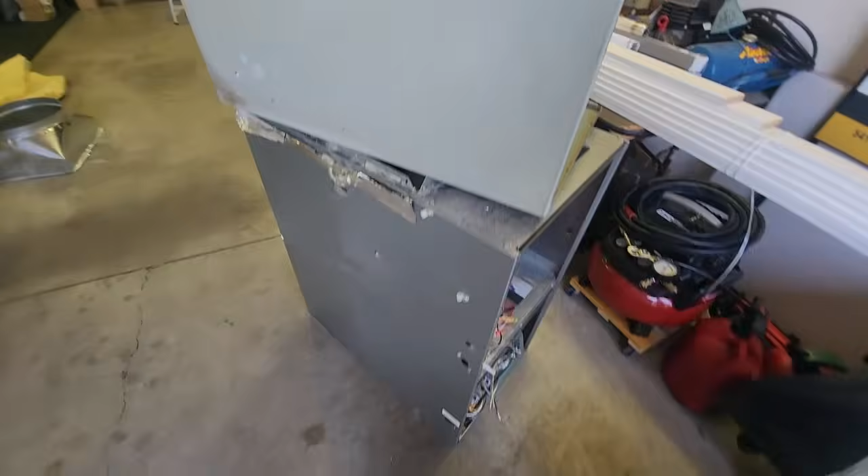Alright guys, we're here on this dual fuel system. There's our old coil, already pulled out, and the old furnace pulled out too. That's the old Rheem rectangle that I love. There's our new furnace, new Bosch heat pump, and Bosch coil. I'm going to reuse that square-to-round.

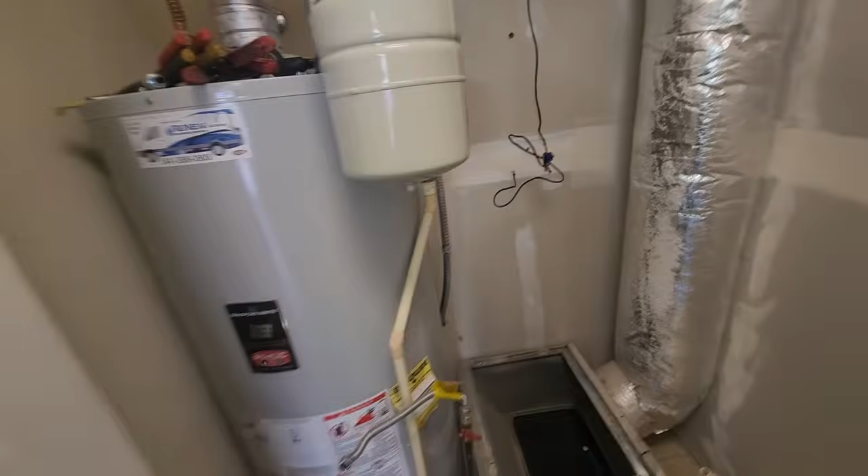I sold the guy an F100 media cabinet, and it's gonna be tough for me to fit it in here. So I'm gonna have to take this Y off, get a bunch of B vent stuff, and reconfigure all this so he can have his filter cabinet in here like I promised him. Adds a bunch of work to myself, but in the long run I think that'll make him happy.

So we're gonna go to Johnstone and pick up some missing pieces and continue on this project. I'll get you some good video today. I was just waiting for him to leave - they had some landscapers here making a bunch of noise. So yeah, we'll continue on when we get back.

Not a bad job, little closet off of a garage. Could be worse.

Alright guys, we are back. I'm going to start reconfiguring my vent pipe here to accommodate a new filter cabinet.

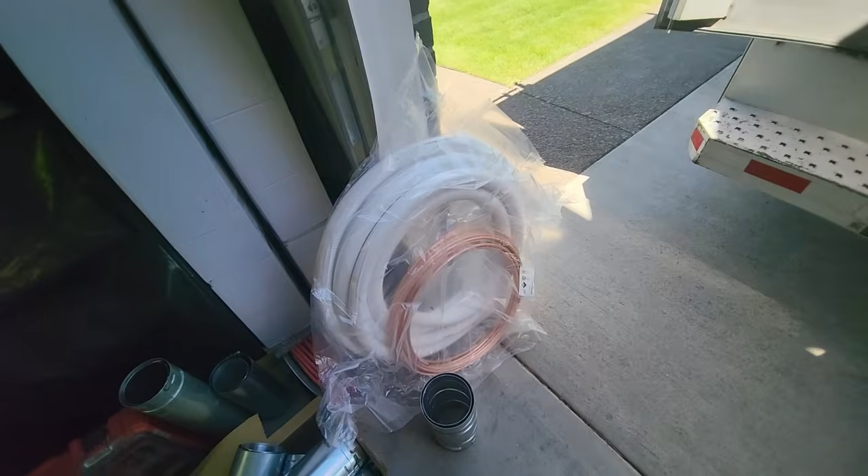Matt is going to start working on prepping our line set. Make sure you use the 8 wire, Matt, not the 10 - don't waste the 10 wire because we only need the 8. We really only need 4, but I don't have 4 wire.

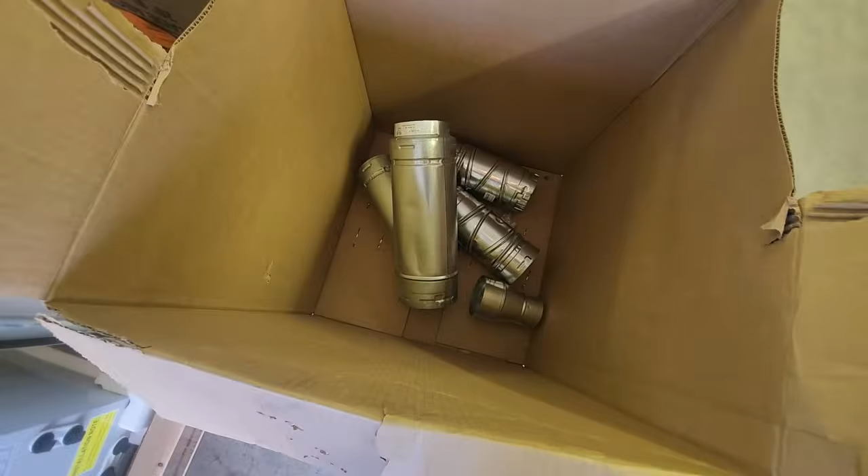They gave us some more goodies here for the vent pipe. I got a bunch of stuff here, so should be able to reconfigure it the way we need it. I'm gonna get going on it. Alright, let's get this guy cut up.

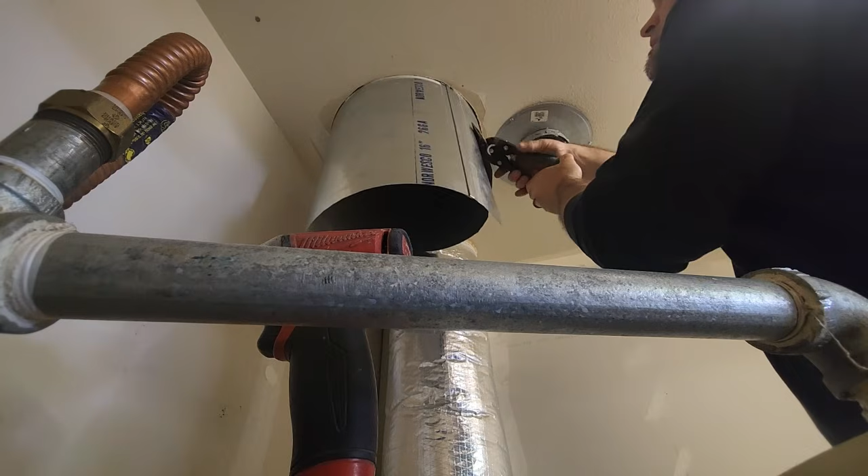More better? More better.

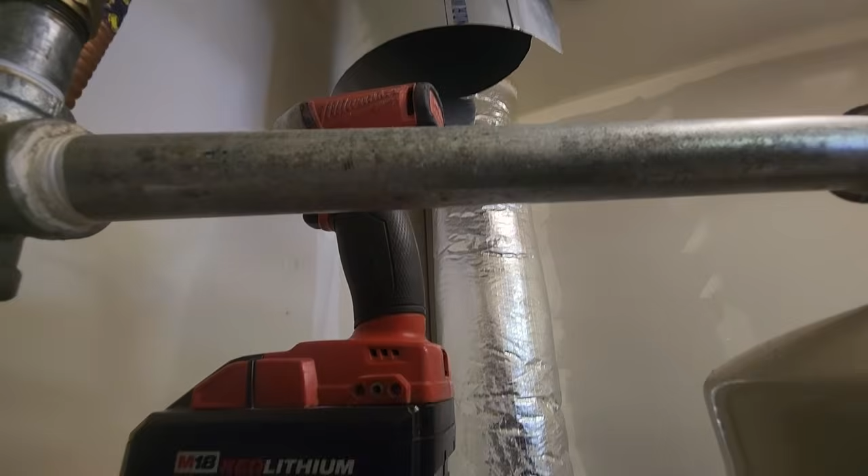Ah, damn it. Hey, that one hanging on your door was the 8, right? You should check it. It is - well, it looks like 8, but my eyes aren't that bad. Or good. Give me a break. Yeah, that should be better. That should be more better.

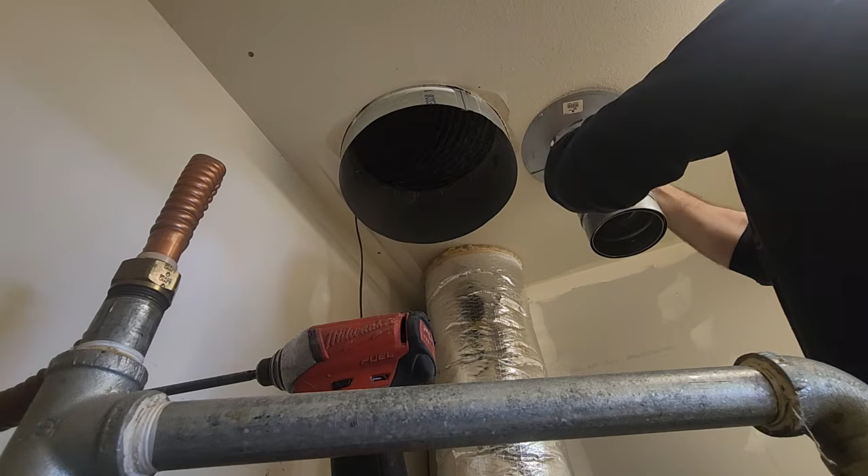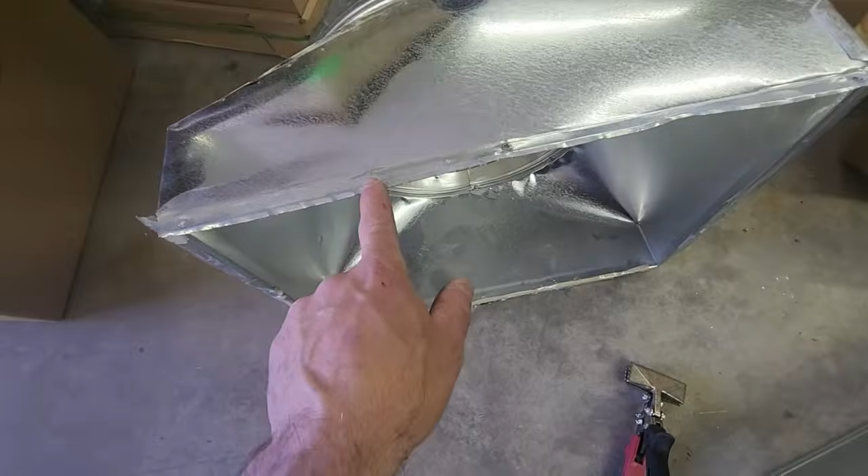Alright, I'm going to get my square-to-round put onto my air cleaner, but I need to flip these flanges around to the inside - they're all on the outside. So let's do that.

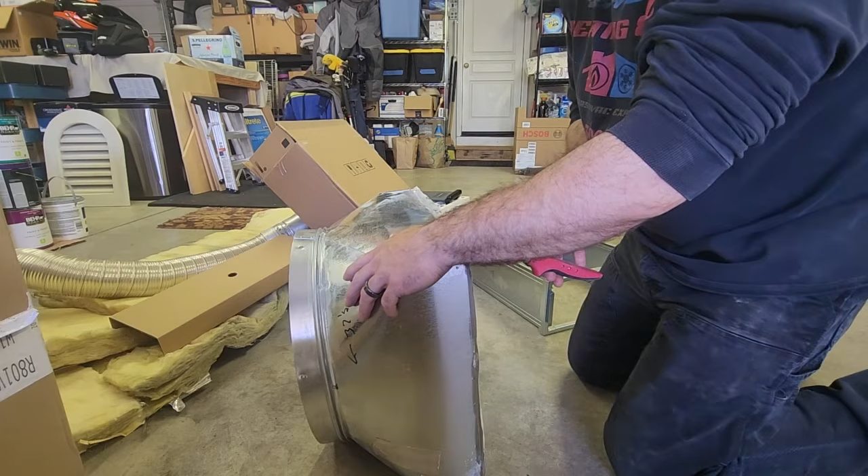Same thing I had to do on that other job. What's that? That's the number 10.

Light gauge metal. Snip those corners.

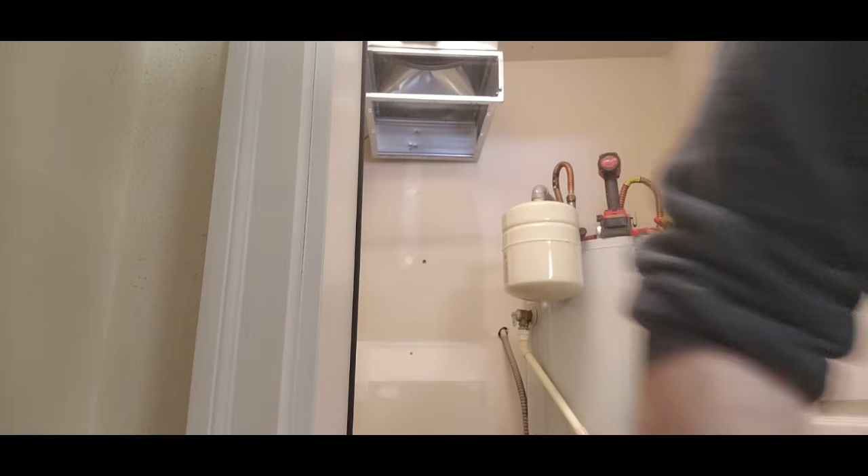Alright, let's go get that furnace. It's like down, right? No. Grab it on the backside. Jesus Christ, there's nowhere to grab it. Can I grab it?

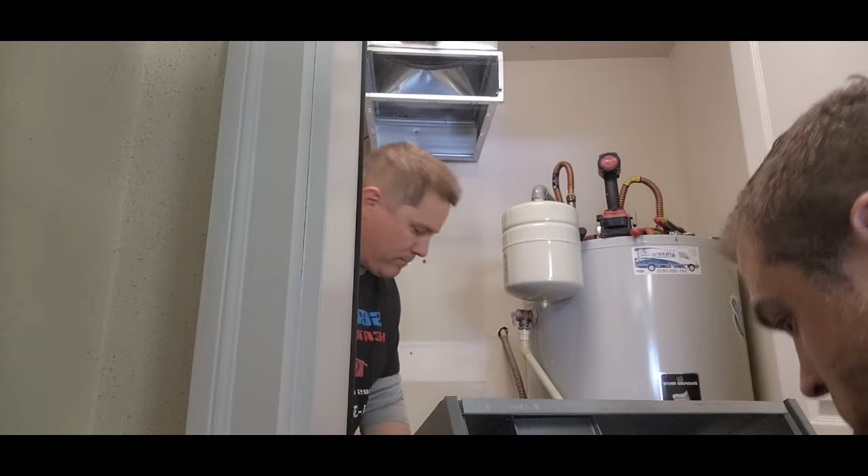No, I don't want to drag it on that. Towards me. Grab it on the clear bottom.

There it is. Beautiful. She is in.

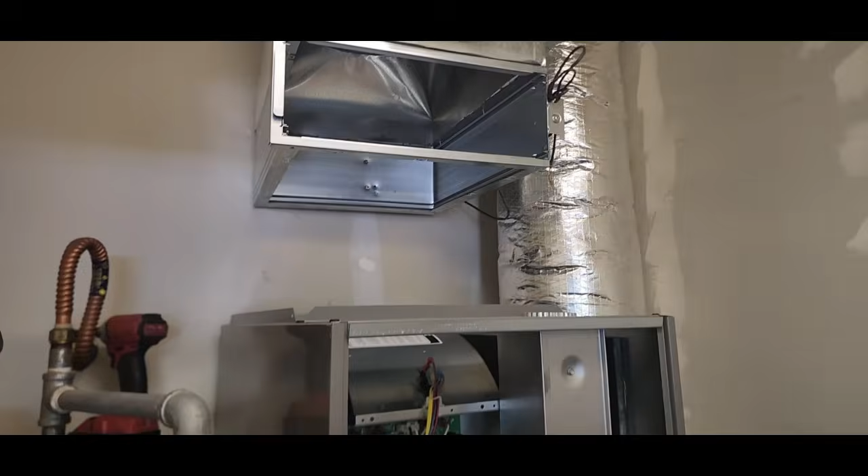That's what I gotta build. That'll come down a little bit too - that'll give us plenty of room for our vent pipe to clear. So able to make it work for him.

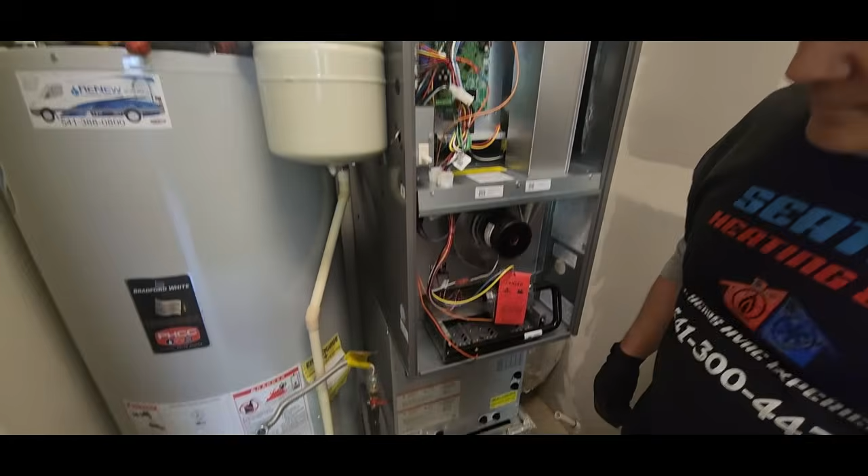She's in, like Flynn. Alright guys, we're looking good. I went ahead and pulled my screws there - sorry, sneezing, the drywall dust. Excuse me. And I got my hole sealed with some tape there, so that's pulled down.

I can get my measurement. I'll build this fitting tonight. I'm not going to temp it or anything, not with the water heater right here. I'm going to get the water heater pipe back in, and then turn the dial off pilot back onto on, so they can have their hot water. I'll get a measurement on this.

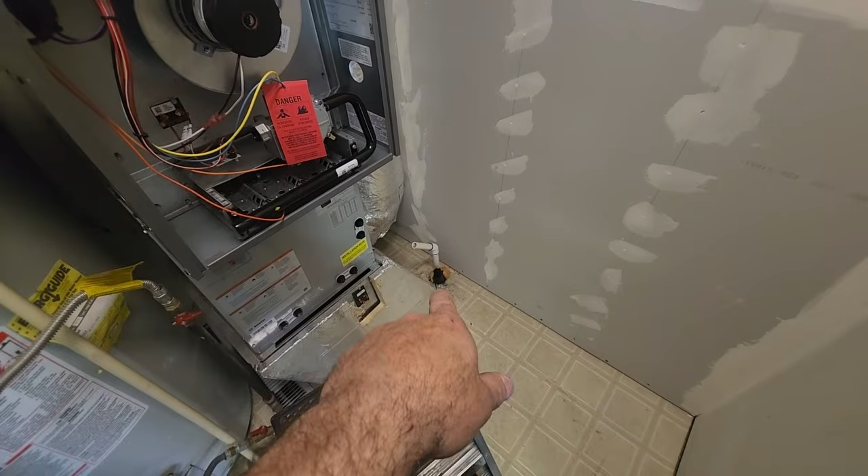I'll start doing some tie-ins, get done what we can. My brother's going to go pull the old line set out - we'll get the new one pulled because I won't have him tomorrow. So we're going to try to get everything done today that I need him for.

Alright guys, just kind of scrambling today. I got my water heater turned back on, reconnected. Turn him back to on, fire him up. I'll go ahead and just tape him off for the night. He'll be fine.

Obviously, I'm not going to get this guy hooked up, but I'll start doing my tie-ins and stuff. My brother's down in the crawl, pulling the line set right now. I'm going to make this hole just a little bit bigger so it's easier for us to pull it through up here. But yeah, we're moving along slowly but surely.

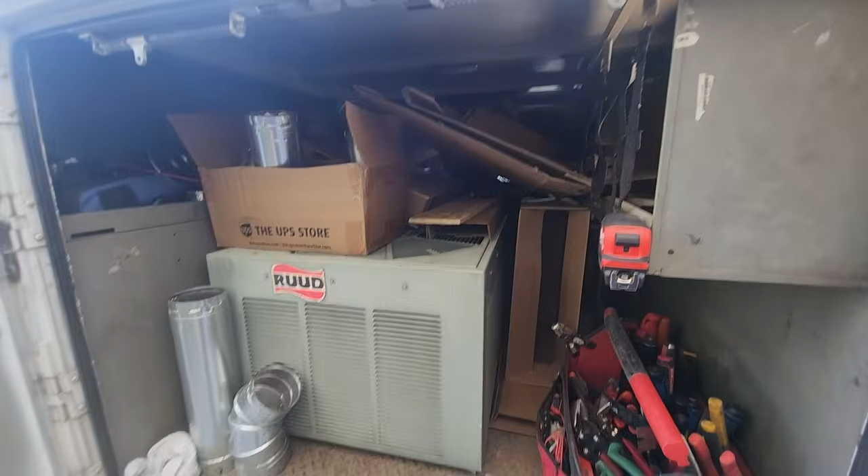All right, guys, it's about 1 o'clock. I always try to keep my work space clean, as you know, my work area. So I got everything thrown in there. Garage is all cleared out except for our condenser, which we're going to get set today. Get that box picked up. But everything's all clean all the way to the unit, which is sitting there.

I got to get a 3-inch elbow to come off the unit so I can make that turn, put my reducer on, and then I'll be able to connect my... sorry about that, I had a message. I'll get my flue pipe connected. I just have it taped over for the night. It'll be fine. Got the water heater fired back up.

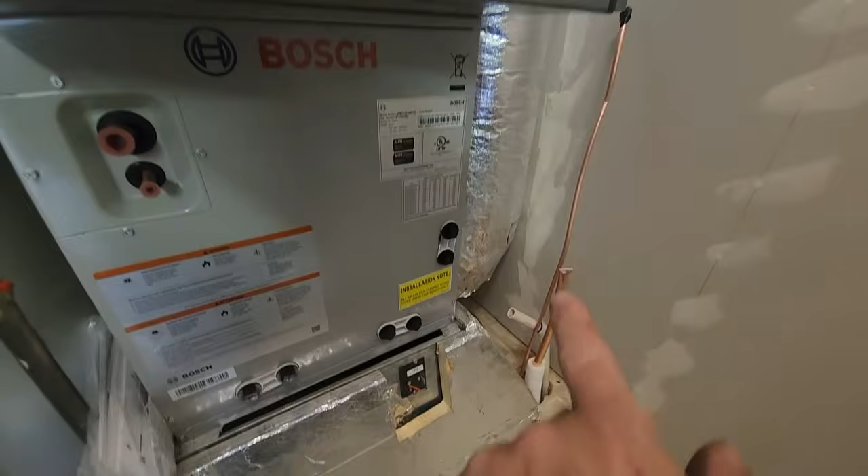I want to show you this too. So here's our line set there. My brother kinked it a little bit there at the end, so I just broke it off. And I'll have to braze from there. There's our 3/8. Nice, quick, and easy. Probably come up and over. Just do an L. It'll be fine.

I could probably get my gas pipe tied in today, get my low voltage in there. Whatever I decide to do today, we'll see. But I'm not getting this going because I'm not leaving an open return next to our water heater. No way. But everything's going to work, so I'm happy.

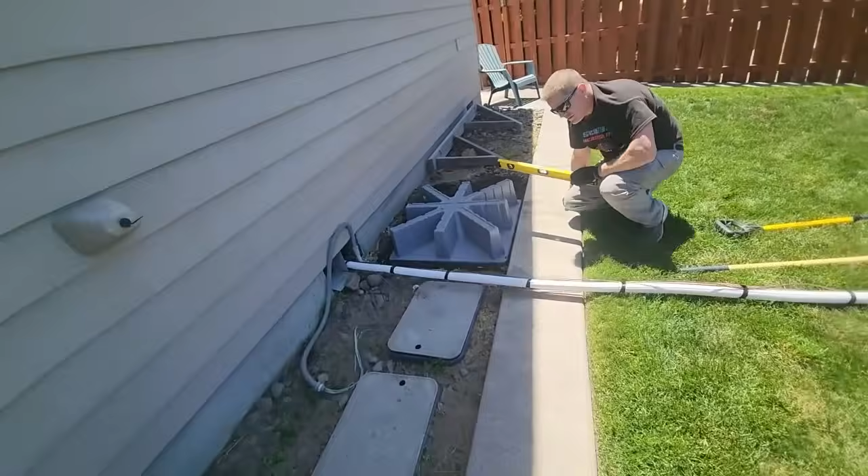Over here on the side of the house, we got Mr. Matt here getting the pad leveled up. Looks good. It's going to be a little bit closer to the wall than I would like, but you know, we're dealing with what we got. We don't want to go any closer to this here and then kind of have it sitting onto this. That would look goofy. So we'll leave it the way it is.

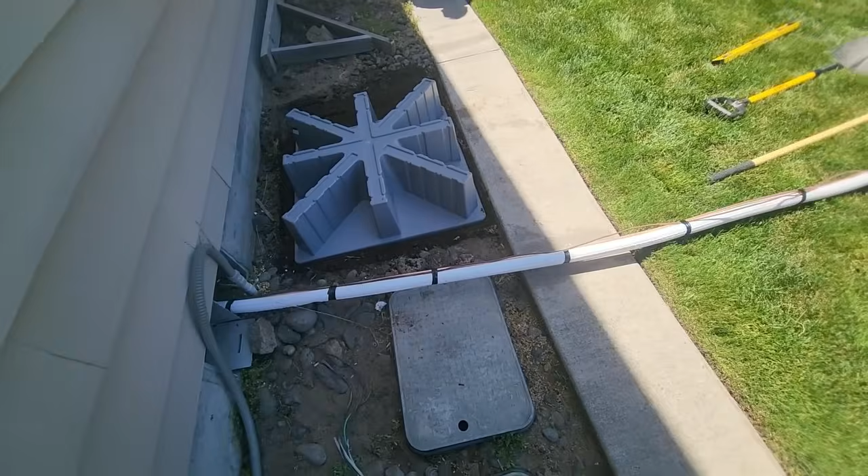There's the rest of our line set there. I can cut this off where I need to out here. And I think the way this electrical is, as long as that is, we'll be able to put the access panel out here so it's easy to work on. I'll just make it so the line set will tie in on the outside. So that'll be nice. And then we'll have plenty on the inside to use.

I'm probably going to go work on tying in that gas after we get this unit set and get the pads underneath it.

All right, Matt's unpacking our BOVB 36HDN1-M18M, 410A. Yep, I'm still getting these. I think I still have one left at Johnstone if they haven't sold it. So Matt's going to get that set. And I'm going to go over and show you, I didn't show you the model numbers of the other stuff. Show you exactly what we're installing here.

Another beautiful day here in the high desert.

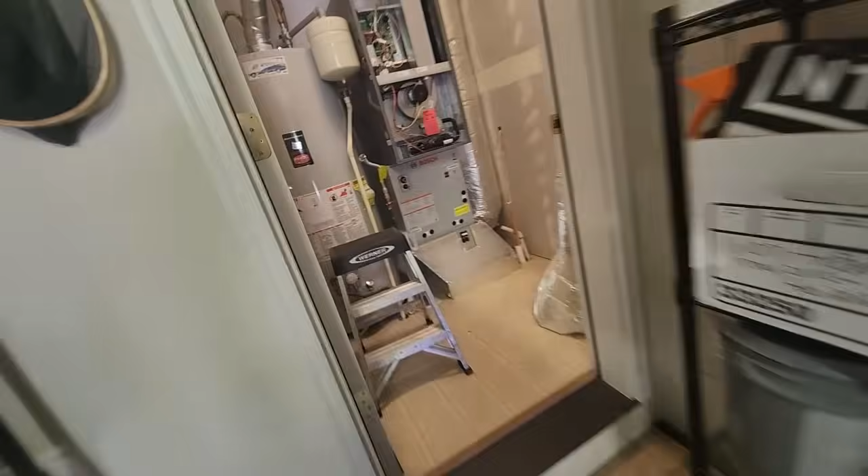Do do do do do do do do do do do do do do. Let

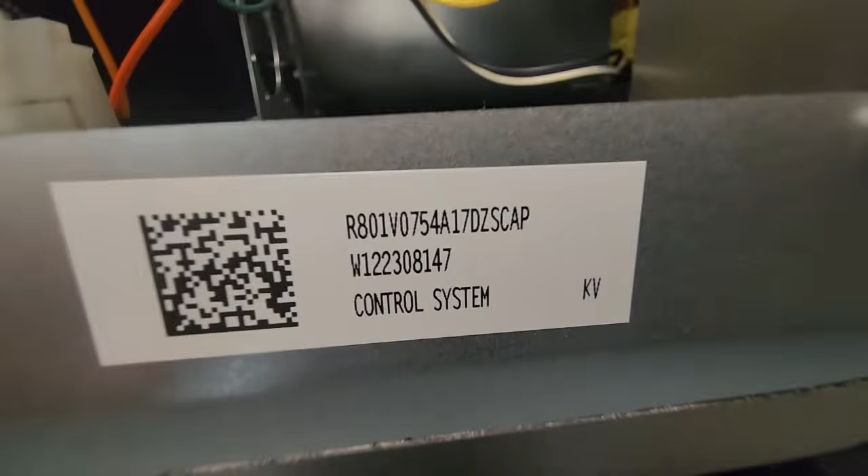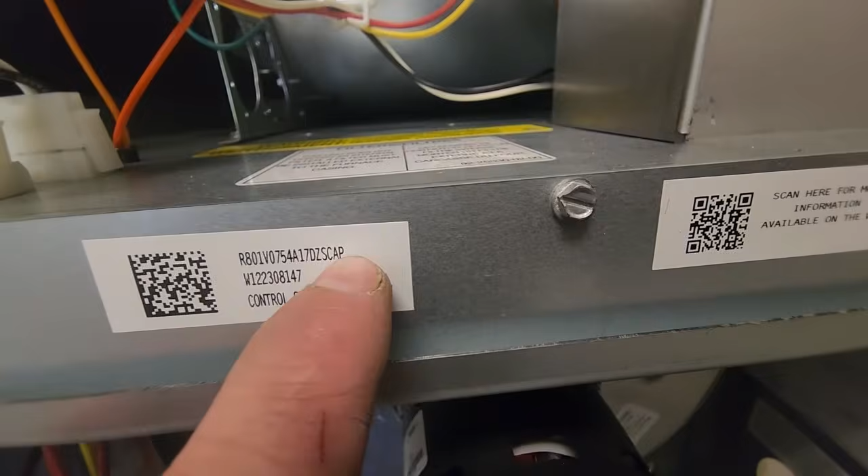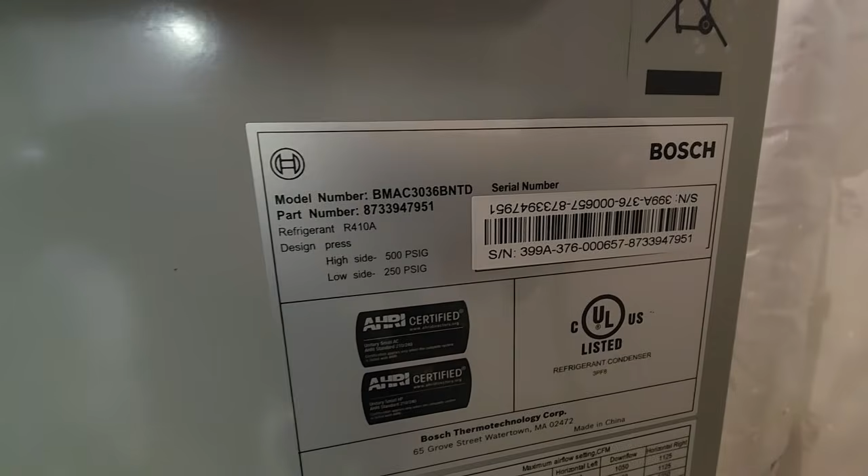Where's my model number on this guy? Do I have a sticker on the outside? I do not. Oh yeah, I do. I got a sticker right there. So this is a Rheem R801V True Variable ECM, 075 4A17 DZ for downflow. I don't know what the rest of those letters mean, some sort of product code. And then our matchup with our heat pump is the BMAC 3036B, denotes that it's 17.5 inches wide. Other product codes NTD. So that's what we're installing out here.

All 410A guys, I'm still installing them. Haven't had to install a 454 or a 32 yet. So I'm gonna go help my brother get that heat pump set over there.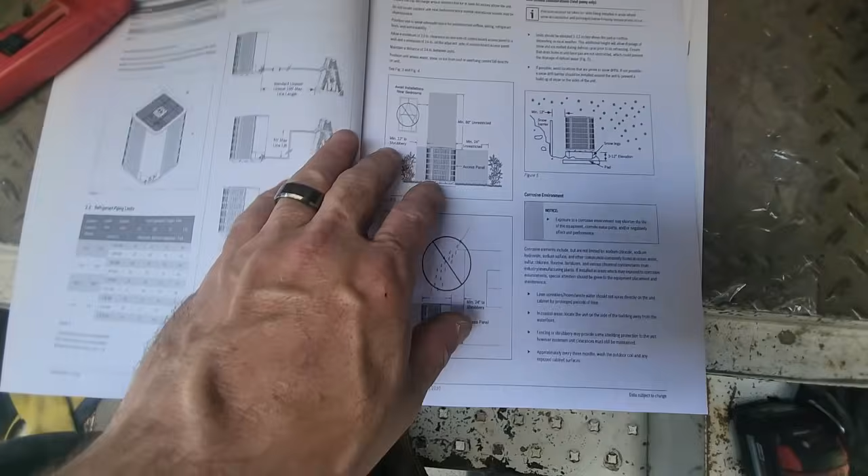All right, so that unit sits a little closer to the wall than I would like. So let's take a look in the old book here. Location restrictions, page 7. RTFM. There's page 7. So what does it show here?

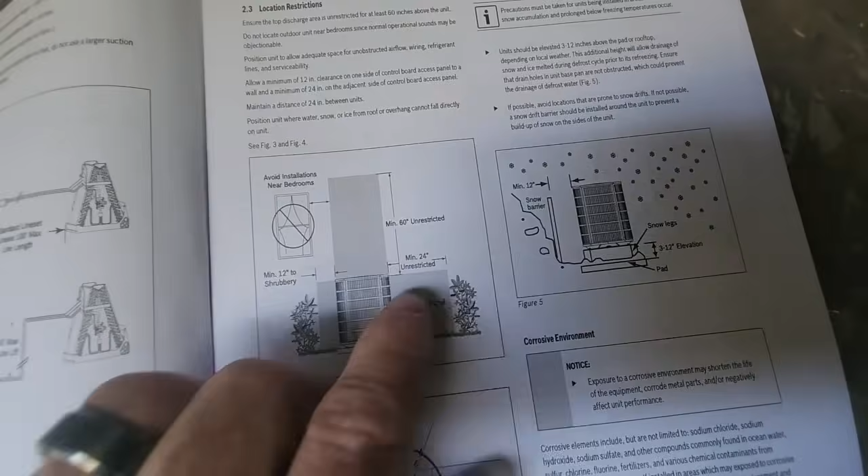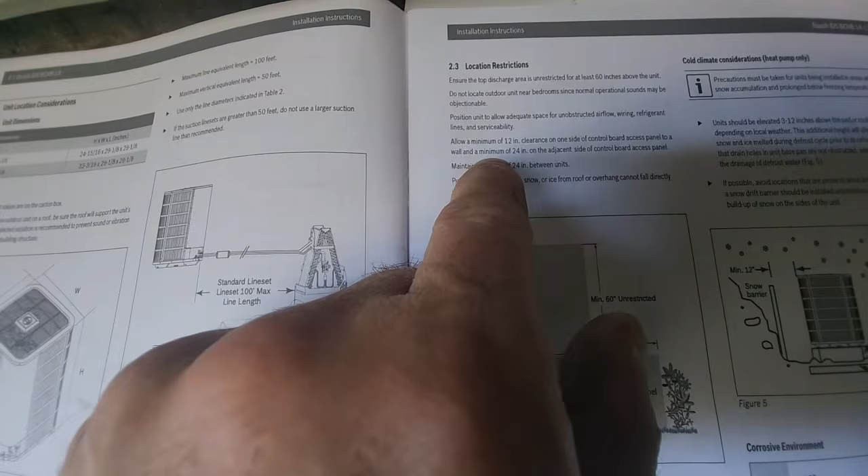Access panel 24, 12 inches to shrubbery, 60 inches above. What does it say to a wall? The unit should be elevated 3 to 12. We've got that covered. Allow a minimum of 12-inch clearance on one side of control board access panel, a minimum of 24 on the adjacent side of control board. Doesn't really say anything. It says 12 inches to shrubbery. What does it say? Where does it say anything about being to a wall?

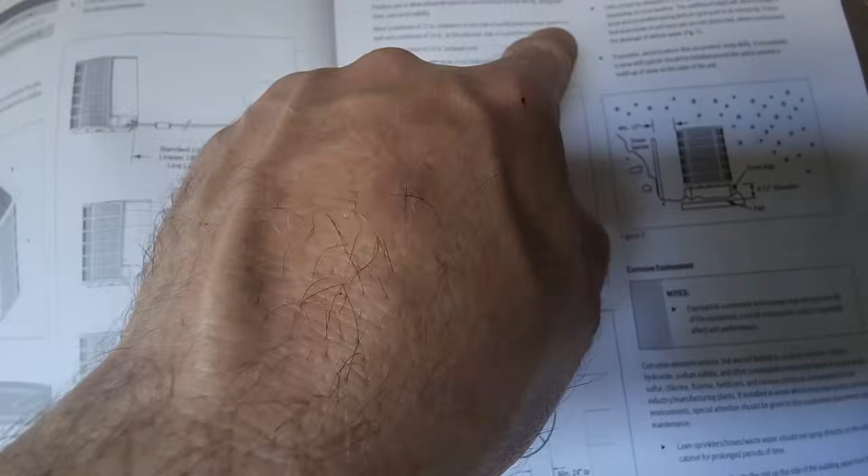I assume wall would be the same as a bush, wouldn't it? That's interesting. Avoid installation, obviously near bedrooms, it says—24 inches on the access side, 12 inches on the other side of the control board access panel. We might have to flip it so that's on the outside. We actually did put it to the access panel on the wall, but we're going to have to put it out here, and I think we'll be fine.

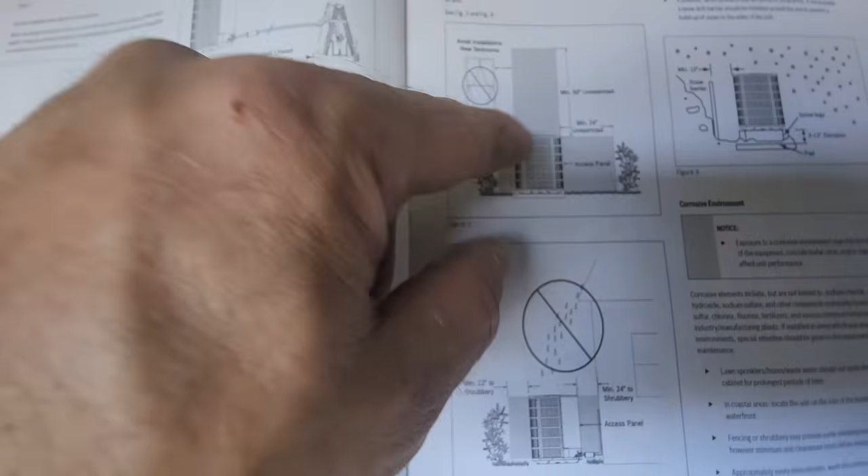Let's go see what we've got outside. All right, so according to manufacturer's instructions, we have our 12 here, 24 here. We have infinity on both, so we're good.

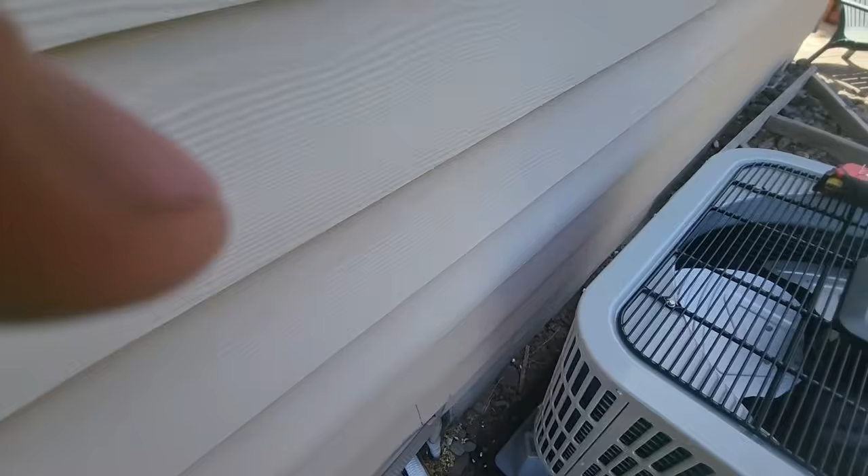On this side, we're going to have our 6 inches, so it is what it is. We're kind of restricted on where we're at here because of this walkway, so I'll call it good. I'll just make sure that when I tie these refrigerant lines in, I keep it tight here so they're not sticking out into the walkway.

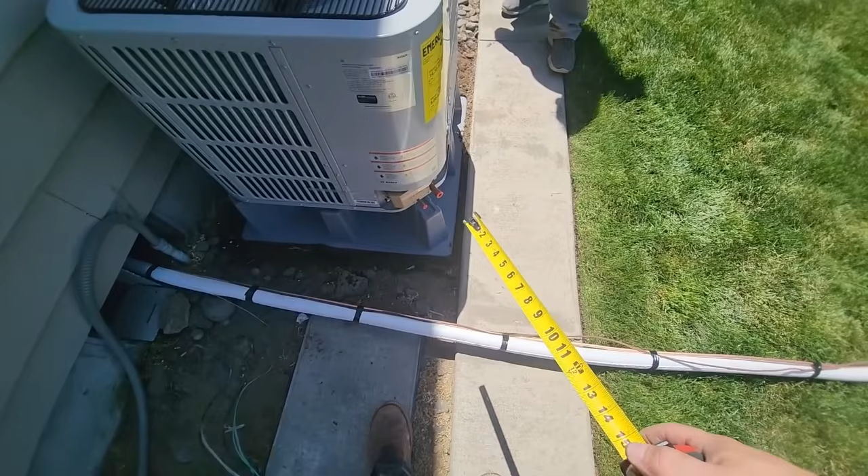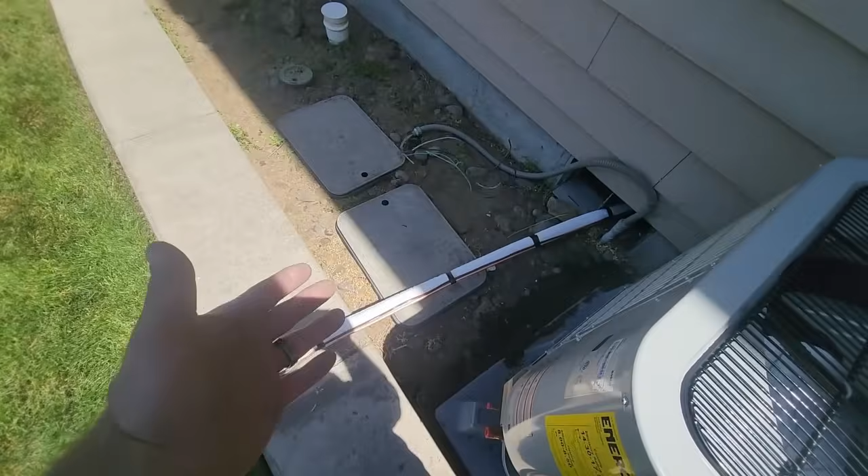All right guys, she's all set. Like I said, I'm going to have the access panel on the outside there, and I do have a gap there. It's not what I would like, but we're dealing with what we got, okay? We're not going to go over his little walkway here, or trim, whatever you want to call that. I'm sure they use that to walk from point A to point B without walking in the grass. My brother's going to cut this, tape it off, make sure it's not in the walkway, so I got plenty of material to tie that in, which will be tomorrow.

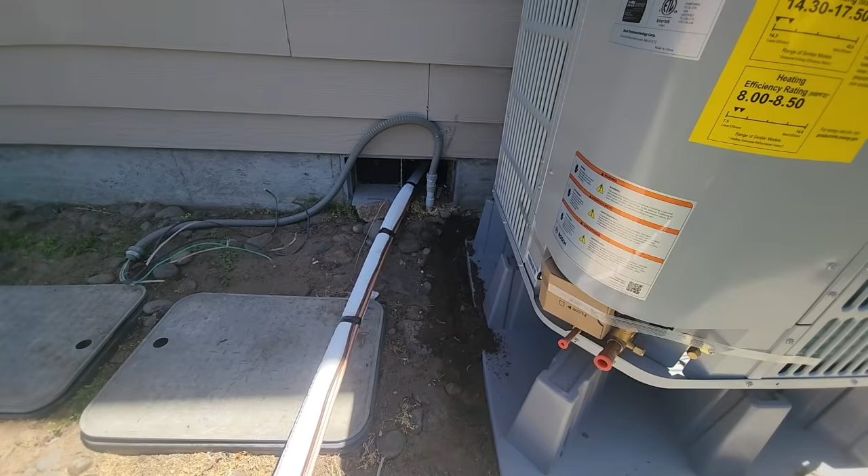Somebody made a mangled mess of that foundation vent, so I'll get that sealed up. Maybe I'll go get one of those foam blocks and cut the corner out of it. Usually works pretty good.

All right, let's get this gas hooked up. Gonna be real tough—one nipple and connecting this flex.

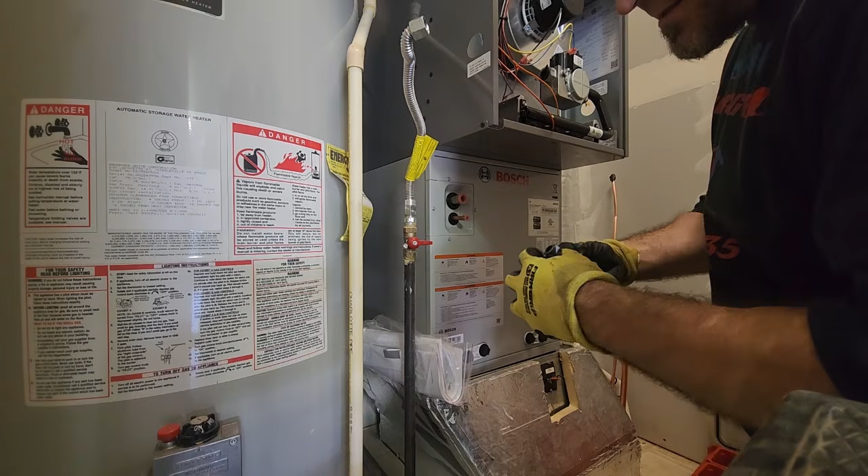I'll go ahead and tape it first. I know one of you guys made a comment that you don't think we should be taping it. Well then, how come they make the yellow Teflon tape for gas pipe then? You want to explain that one to me?

Where the heck's my pipe dope at? It's not in my organizer. Hold on a second guys, I'll be right back. Alright, I got my white Teflon dope here, coupled with this. I'm just using this blue monster tape because that's what I happen to have in here. Not too much—don't add too much. Try not to get any on the inside of your pipe.

This for tomorrow, right? Yeah, tape this in there. Make sure you tape those ends in case something gets in there.

I don't like my end that tight. Put that much pressure on the end of the flex.

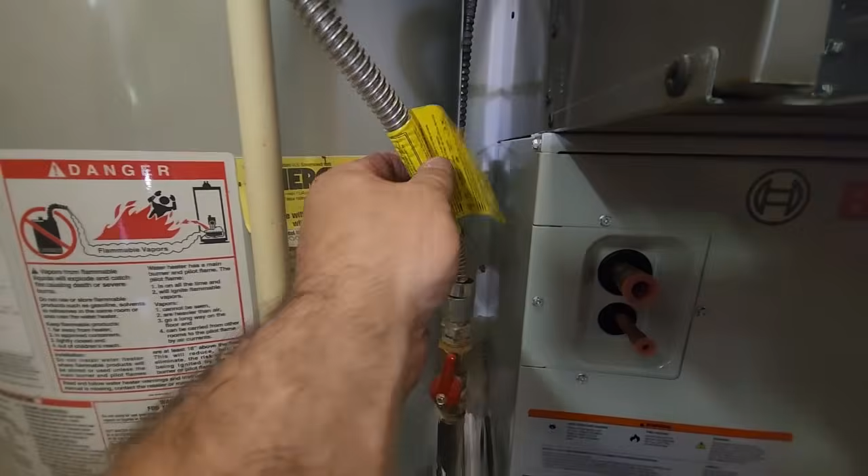They say you're not supposed to rip these labels off, so what I do is I'll take a piece of tape and just tape it so it's nice and clean. Don't know if I really like how tight they had that flex there, but I straightened it out. Looks like it still has its integrity.

Valves back on. I'm going to go ahead and spray these down. Then I'll work on—we could tie the electrical back in. It's nice about this being a like-for-like furnace, it's real easy to tie everything back in.

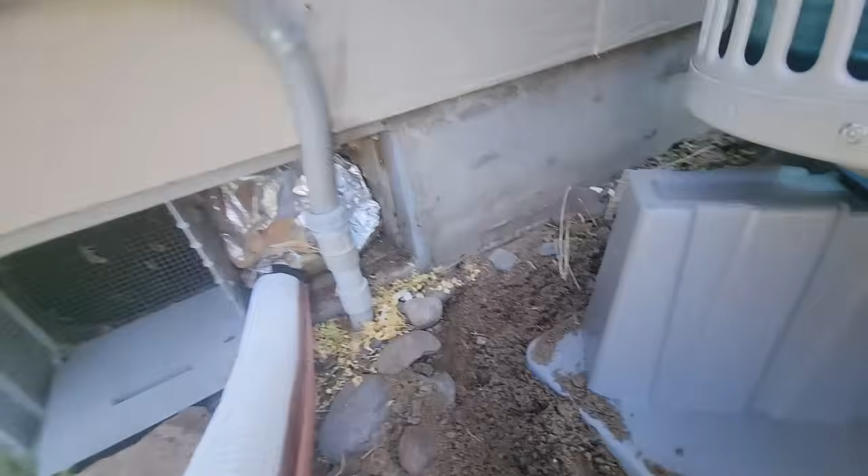Alright guys, here's how my brother left it over here. Get this bent out of the way. Get that braced in tomorrow. Went ahead and just shoved some insulation in the broken foundation vent. We're going to bring a foam block out and fix that up and seal it off.

We're looking good. I'm going to show you the inside, what we got going on here. Got a little more time. I might do a little refrigeration piping if I feel like it. Too nice of a day to be working, 80 degrees.

That keeps sliding over, I want that staying like that. Somebody keeps leaning on it. Might put a drive on it to keep that thing from twisting. There's a little gap there above the coil, but we're going to leave it for today.

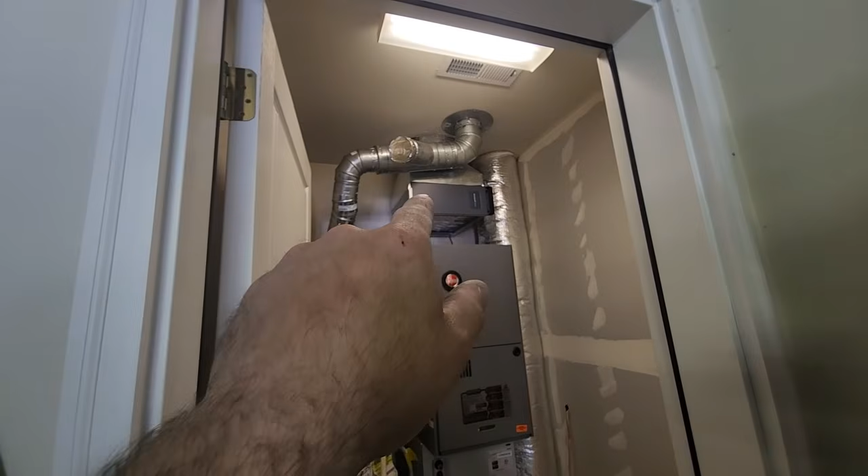I mean, I can do all that. I can get that braced in first thing tomorrow and get it on vacuum, and I can do the drains and stuff while it's pulling a vac, so no big deal. Main thing is get home and get that fitting built tonight, so I got nothing holding me up. I got to get some more stuff from Johnstone too for this vent—I need a 3-inch elbow and a couple more 4-inch elbows of the metal fab. I think we're going to get on out of here.

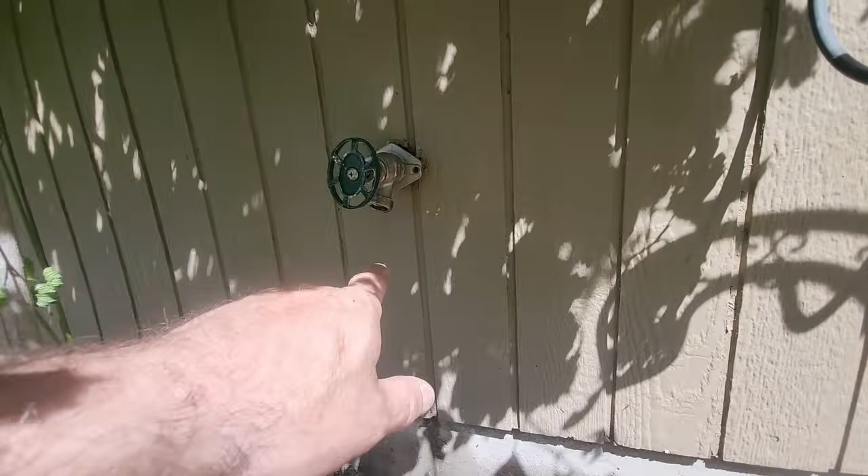So now here I am helping my brother with a water spigot. He thinks that the threads on it are stripped or something. That's not even where they seal, dude—they seal on the face. The gasket hits the face of your water spigot there, they don't seal at the threads. So I'm gonna humor him and take it out, and we'll go get him a new one. But that's not the issue—it's the gasket in his hose.